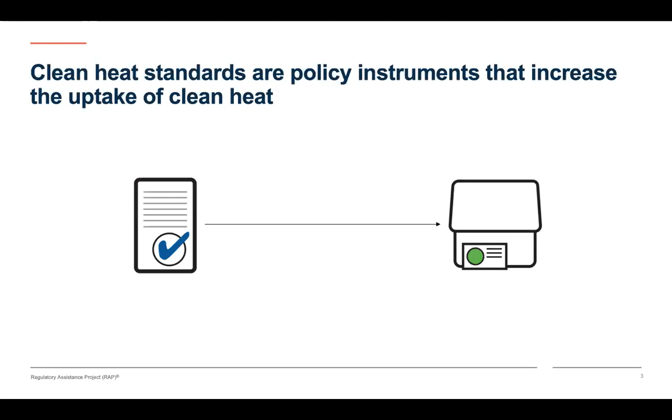So what are clean heat standards? Well, they are policy instruments that increase the uptake of clean heat. So this definition of clean heat, I'll get back to that because it's quite important, but it's very relevant to note that we're talking about policies here. And they do that by putting a quantitative obligation on heat market actors. So let me explain what we mean by that.

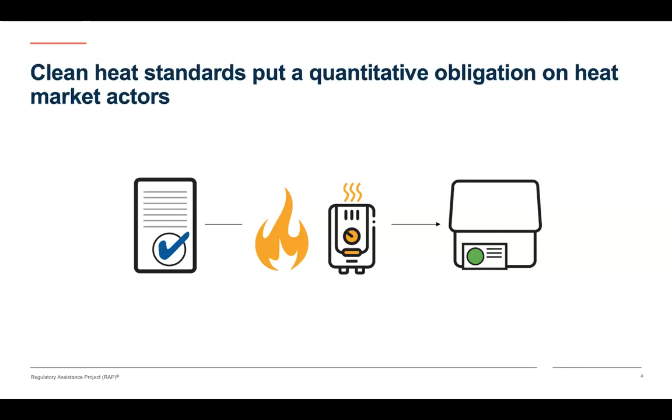So an obligation on the market actor is not an obligation on an end user. So we identified two broad families of clean heat standards. In the first family, the obligation is put on energy companies. And here, it can be different types of energy companies. So it could be those companies that supply heat, those that distribute heat. It could be an obligation put on companies that provide fossil fuel heat or on all companies that provide heat.

And this kind of clean heat standards, they are quite similar to other types of obligation that can be put on energy companies. And I'm thinking, for example, about renewable portfolio standards that are put in place to promote renewable energy in energy companies' energy mix, or energy efficiency obligation schemes that are obligations on energy companies to realize energy savings among their end users.

Now there is a second family of clean heat standards. And we actually only have one example that is being developed in the UK. And it is a case where the obligation is put on heating appliance manufacturers. And in that respect, the tool can be compared to obligation on car manufacturers. So for example, the CO2 standards that we have in the EU, but that also exist in some states in the US. So you can compare these clean heat standards to these transport policies.

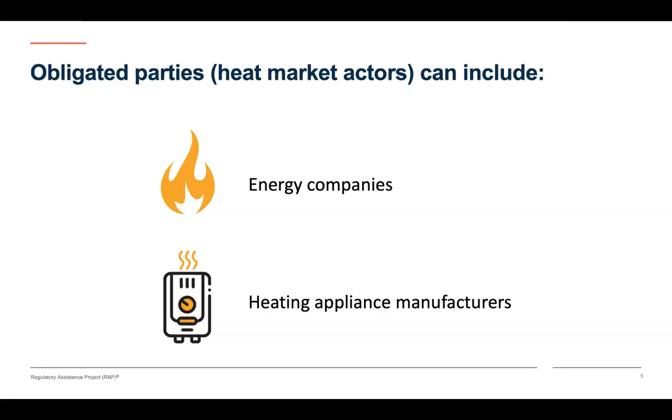Usually the objective grows over time. So the ambition grows over time. You need to take more and more action in order to meet the objective. And for example, if the objective is a share of renewable heat, it means that the policy is mainly focused on renewable heat and not other objectives, and that this is the kind of action that is required to meet the objective.

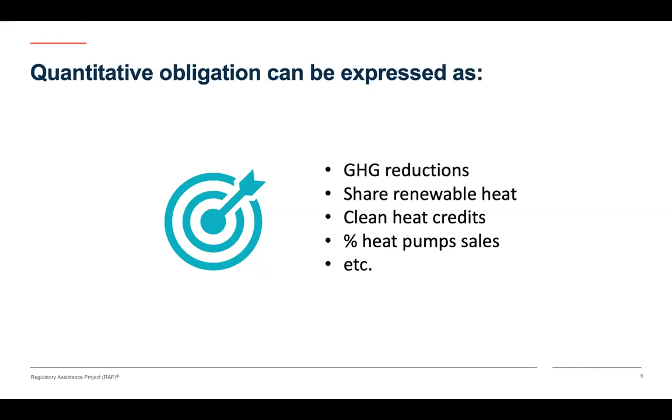So now what makes clean heat standards different from other policies like eco-design requirements is that obligated parties have some flexibility in how they achieve their target. So they can decide how they are going to achieve the target. So usually there are several compliance pathways for them, not just one way of doing it.

Very often they can establish a contract for delivering their target. And also in many cases, there is a possibility for obligated parties to trade compliance credits. And it's quite an important part of this flexibility element.

So even when the tool is flexible, in many cases, actions eligibility is defined or restricted. So we see mainly two types of actions that are allowed, actions that are considered as delivering clean heat. So the first type of actions, I call them downstream actions. So they are all actions taking place at end user level. So for example, replacing heating appliances or reducing heat demand through building insulation. So those are downstream actions.

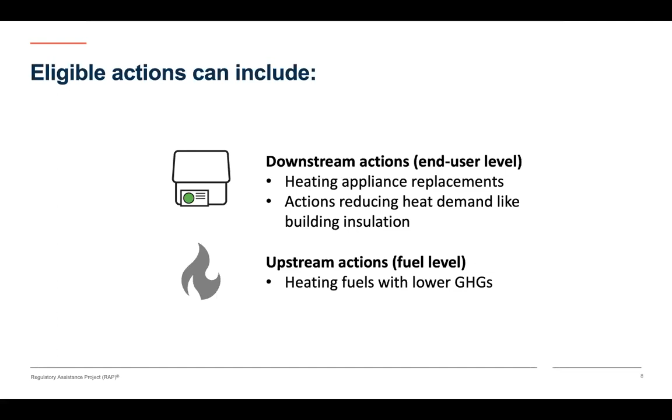So for example, if the objective of the instrument is to boost the market for heat pumps, then the target will likely be put in terms of number of heat pumps deployed. And then eligible action, of course, is heating appliance replacements. So it wouldn't make sense to be injecting heating fuels with a lower greenhouse gas to meet that obligation. I'll get back to it with some example because it's easier.

So here is an overview of the examples we found in Europe and in the US. So there are actually more states in the US that are interested, but we don't have detail on the design features they are considering. So we did not include them in our review, but we will in the future when we update this research and once more examples become available.

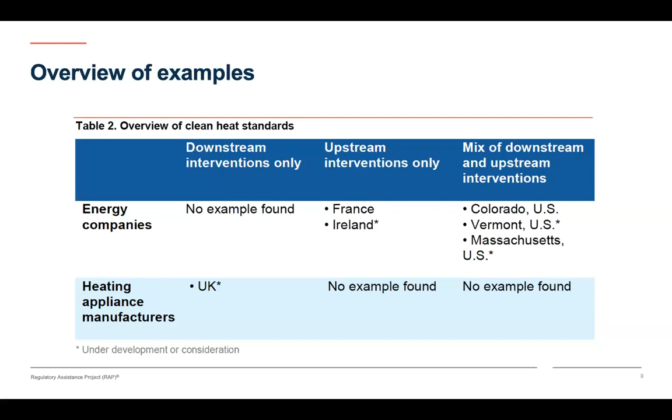Let's start with Colorado. So in 2021, a legislation was voted, and we expect the first clean heat plans to be filed this year in 2023. So in this clean heat standard, gas distribution utilities have to file clean heat plans that explain how they will cut their emissions. And they have targets that they should meet.

So it's -4% by 2025, -22% by 2030. And this is in terms of greenhouse gas emissions compared to a 2015 baseline. And there will be further targets that the Public Utilities Commission will set in the future. So the scheme is expected to continue until 2050.

So as you can see on the right side of the graph, utilities have a lot of flexibility in how they meet their targets. So they can use a mix of clean heat resources that reduce greenhouse gas emissions. And this includes energy efficiency programs, electrification programs, green gas, recovered methane. So it's really a wide eligibility.

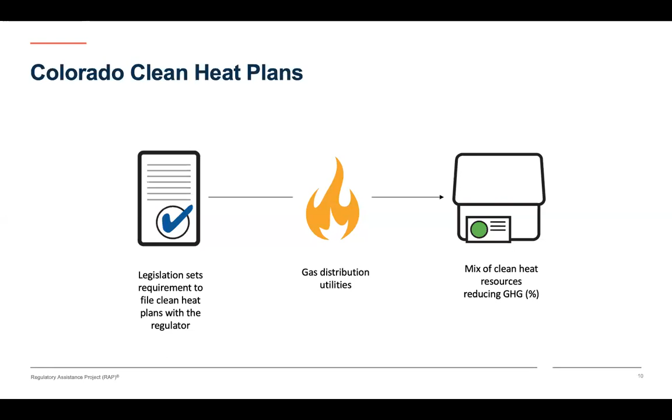Another scheme which has a broad eligibility is in Vermont, where legislation is being developed. So it's not yet in place. And the idea there would be to put an obligation on the regulated gas utility, but not only. So companies that produce or import other heating fuels like heating oil would also have an obligation. And obligated parties will have to generate or buy clean heat credits. And those clean heat credits come from putting in place clean heat measures.

And here again, the definition of the measures is quite large with some restriction, and I will get back to that point. But overall, it is possible to put in place upstream interventions like blending and downstream interventions like energy efficiency or heating system replacement. The targets will be based on Vermont climate targets. So it will be a number of clean heat credits, but this number will be based on the company's fair share of what they're supposed to do for Vermont to meet its climate target.

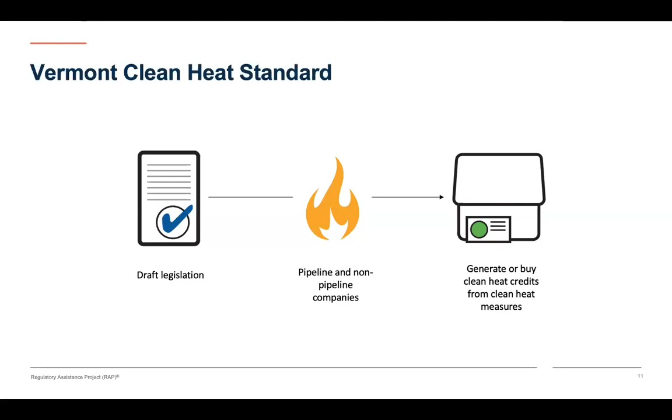Now, moving to a slightly different tool, Ireland is considering putting in place a renewable heat obligation. There was already a public consultation. The tool was now announced, and we're expecting another public consultation in the coming week. The idea here would be that heating fuel suppliers will need to ensure that a certain share of the fuel they supply is renewable. And they will be able to trade credits with each other. And the heat obligation rate, which is the percentage of renewable heat expected from them, will grow over time.

So this obligation is limited to blending. There is no possibility, for example, to use energy efficiency programs to meet the obligation. There is something a bit similar in France, where there is a blending obligation on biogas. But here, we need to see how this evolves, because one of the reasons this tool was considered is that Ireland wanted to meet its EU obligation under the Renewable Energy Directive. And now the Renewable Energy Directive allows member states to also count some electricity used by heat pumps as part of the renewable heat obligation. So it could be that the scheme also allows that in the future. We will need to see what will be in the consultation.

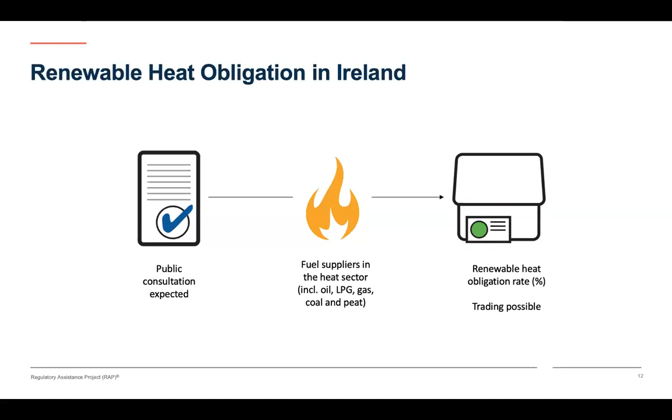And now moving to the different model I was talking about, the obligation on fossil fuel heating or heating appliance manufacturers. We have one example, which is the UK, and it's under development. There is a public consultation ongoing right now. The idea would be for heating appliance manufacturers to have targets for the number of heat pumps sold compared to fossil fuel boilers. There's quite a lot of detail about the design of this scheme in the public consultation, and it's quite interesting to read this detail, actually.

So there will be a possibility to trade as well, and manufacturers that only produce heat pumps will be able to sell credits for the heat pumps installed by them. So the obligation is on fossil fuel heating appliance manufacturers, but there will be credits put on the market by heat pump manufacturers.

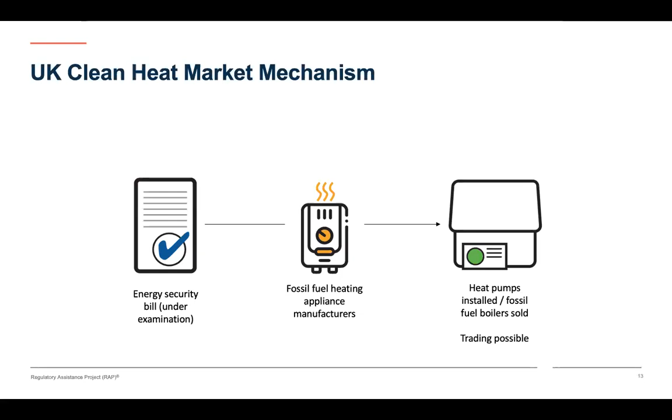So here is a summary of those four selected examples. There are more examples in our report if you're interested, and we will continue gathering examples and design features. As you see, we call these tools clean heat standards, but they're quite diverse. The starting point is always that in these places, governments realized there was a gap in terms of the policies put in place to decarbonize heat.

And as you can see from the first line, the type of obligated party can be a bit different. From the second line, you will see the target can be expressed differently. And on the third line, you will see that the eligible actions can also be different. So under clean heat standards, we call clean heat standards tools that are very different from each other.

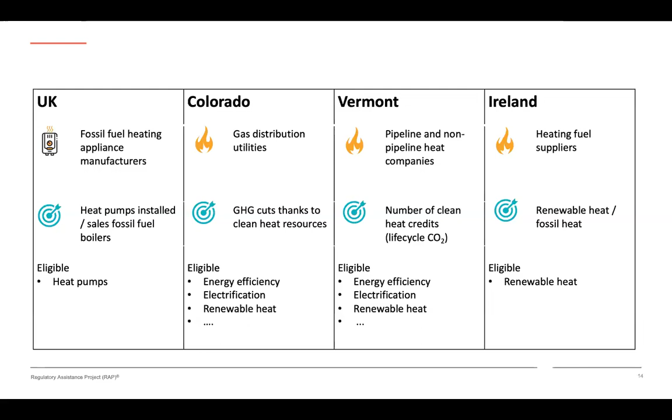These are all quite new tools or tools that are under development. So we are still figuring out what their role will be in the future policy framework. Now they are quite similar to other tools in energy efficiency, in renewable policy, or in transport policy. So we have some trust that these tools could actually work and deliver some benefits.

So we think they can help with emissions cuts, that they can bring benefits to end users, including low-income households, and that they can provide a signal to the clean heating supply chain. This, of course, depends how they are designed. So some design features will help achieve some of those goals. And also, it depends how they fit with how they work with other policies in the heat space.

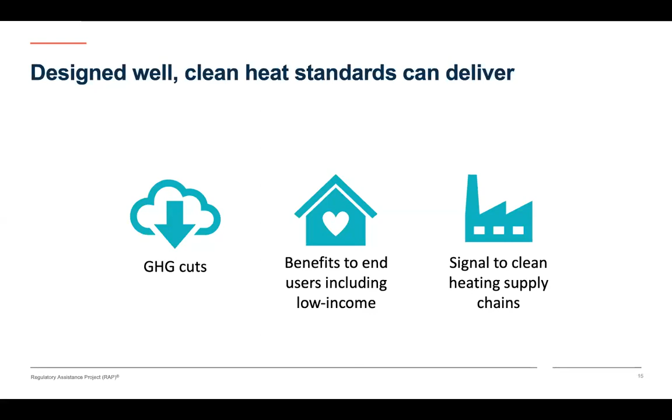So, for example, we think that clean heat standards could work well with bans on fossil fuel boilers, because we think that clean heat standards can help prepare the market. Now, moving to the lessons learned, we think that a clean heat standard can set a trajectory for heat decarbonization and facilitate an end date for the sale of fossil fuel boilers.

So I'm going to show a graph which captures the sales of heating devices in Europe. In blue, you have the number of condensing boilers, and in green, the heat pumps. Of course, this is changing now in the past 2 years, which are not captured in this graph because data was not complete when we completed it. So the number of heat pumps is growing, but we're still selling a lot of fossil fuel boilers. And these boilers will stay in our homes for quite some time.

So we think that there will be a need for policies to prepare the market for scaling up clean devices, but also, even after those fossil fuel boilers are not on sale anymore, we will still need policy to go and actively remove the boilers from homes if we are to meet our climate targets. So we're looking into the role that clean heat standards would play in that context, and we'd be very glad to hear your views.

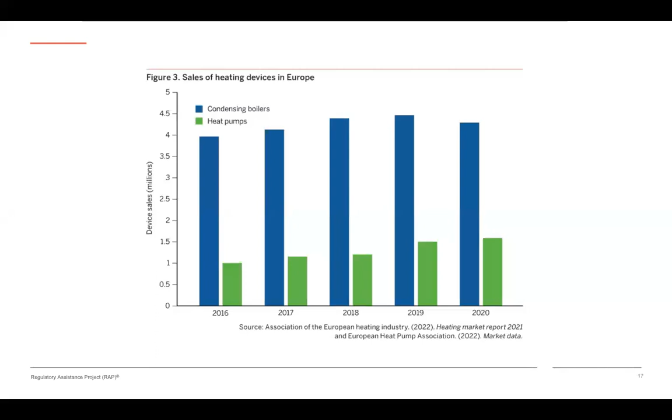Another lesson learned is that we think that a clean heat standard can support the just energy transition. And we think that this requires a very careful design. So those who design the scheme should really think about who pays and who benefits from the standard. But we have seen some examples, for example, in Vermont, where there is a sub-target for low-income households in the scheme. So low-income households would benefit from the actions that energy companies are putting in place. And that is a target that is mandatory for obligated parties to meet. So this is an example of how design features can actually help the tool deliver benefits for the just energy transition.

We think also that decision makers that are designing a clean heat standard can ensure that the clean heat solutions promoted by the policy do not create lock-ins. So that is linked to how we define clean heat. Decision makers have the flexibility, they have the possibility to exclude some solutions if they think it's not a good idea for the energy transition.

So again, an example in Vermont: there the idea is that replacing a fossil fuel boiler with a more efficient fossil fuel boiler would not be eligible under the clean heat standard because while this would reduce greenhouse gas emissions to a certain extent, this would actually lock the households into having a technology that they might have to replace shortly after because of decarbonisation targets. So we think that it is possible to address these issues through the design of the clean heat standards.